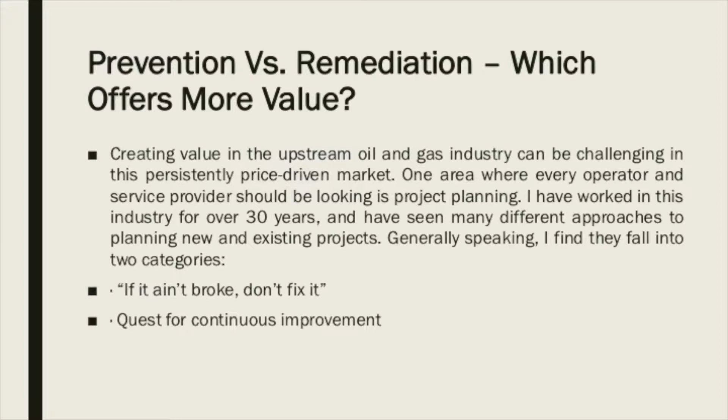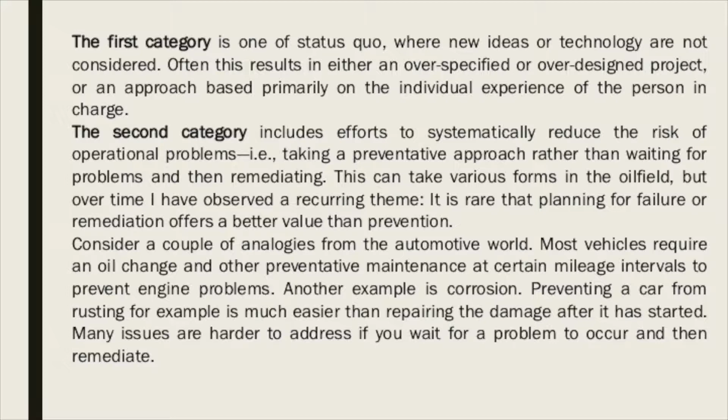One area where every operator and service provider should be looking is project planning when they're building the new equipment. I've worked in this industry for over 30 years and have seen different approaches to planning and existing projects. Generally speaking, I've found two categories: if it ain't broke, don't fix it, and a quest for continuous improvement. The first category is one of status quo, where new ideas and technology are not considered, often resulting in either an overspecified or over-designed approach to building new equipment, otherwise based on a person's knowledge of who's in charge of the project.

The second category includes efforts to systematically reduce the risk of operational problems, i.e. taking a preventative approach rather than waiting for problems and then remediating. This can take various forms in the oil field, which I'm sure we've all seen. But over time, I have observed a recurring theme: it is rare that planning for failure and remediation offers a better value than prevention.

Consider a couple of analogies from the automotive world. Most vehicles have a maintenance schedule where you change your oil at certain intervals and or mileage. Another example is corrosion. Preventing a car from rusting is much easier than repairing it after it starts to rust. And many issues are harder to address if you wait for a problem to occur and then remediate.

Another consideration is financial risks. In any project, it is necessary to understand commercial risks. Unlimited investment to prevent risk is likely not an appropriate business decision, and eliminating risk entirely is often not the end goal. A balanced approach that seeks to reduce risks to the lowest level that is reasonably practical can drive better decisions. If the risk is a commercial risk, an analytical approach can be used to estimate the probability that a risk will occur and the associated cost.

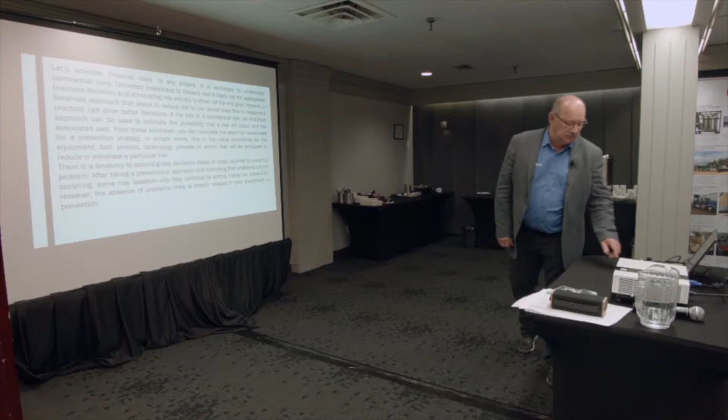One of the things I would encourage, and we encourage our engineers and operators, is to build a preventative approach into their project designs while they're designing the new equipment, and to involve the operators and the engineer in the design, while understanding the commercial risks. As stated earlier, planning for failure and remediation is rarely a better value than prevention.

By utilizing reliability engineering, which provides the structured foundation for identifying and prioritizing critical assets, since nearly all equipment requires some form of inspection and maintenance procedure to monitor their integrity and health conditions, to prolong life or to prevent catastrophic failures. We have the technology today to prolong life and prevent catastrophic failures by using automated diagnostic systems to monitor equipment.

Combining this approach with financial data, businesses can make risk-informed decisions to provide the most value through increased safety, reduced downtime and non-productive time, improved efficiency, and improved performance.

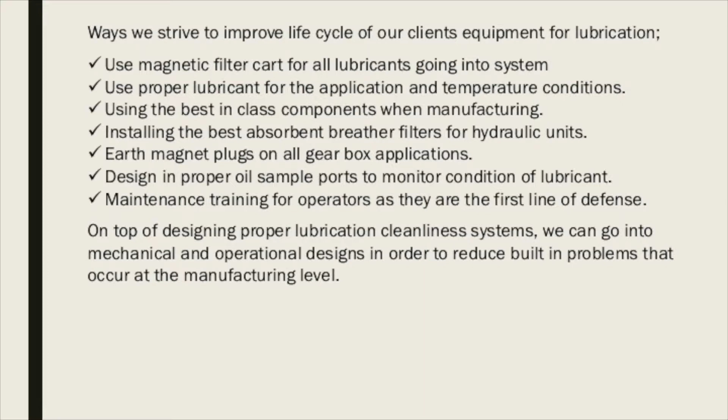Ways we strive at Wrangler and Coil Solutions to improve the life cycle for our clients' equipment, for example with lubrication: we use magnetic filtration carts for all lubricants going into fluid systems. We use proper lubrication for the application and temperature conditions, using best-in-class components when manufacturing, like magnetic filtration. We install the best absorbent breather filters on hydraulic units to keep the water out.

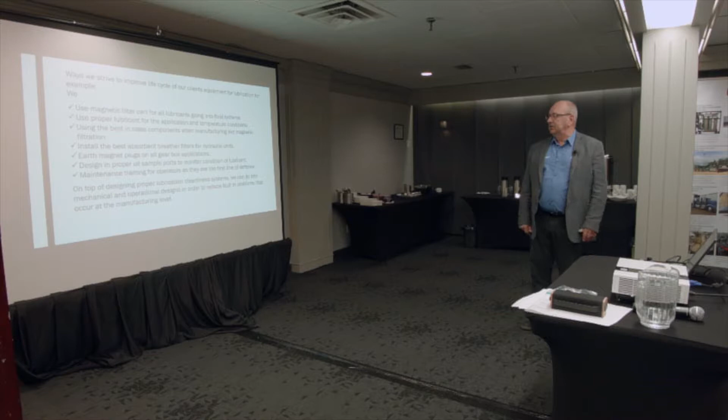We use rare earth magnetic plugs on gearboxes, transmissions, planetaries, and drive differentials. We design proper oil ports for monitoring lubrication conditioning, and we offer maintenance training for operators and others, as they are the first line of defense in running the equipment.

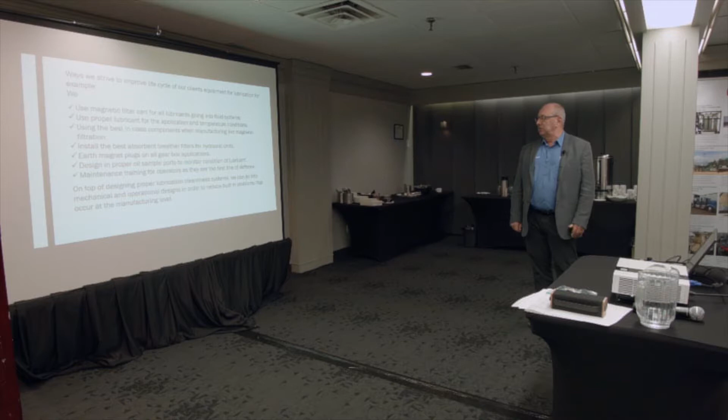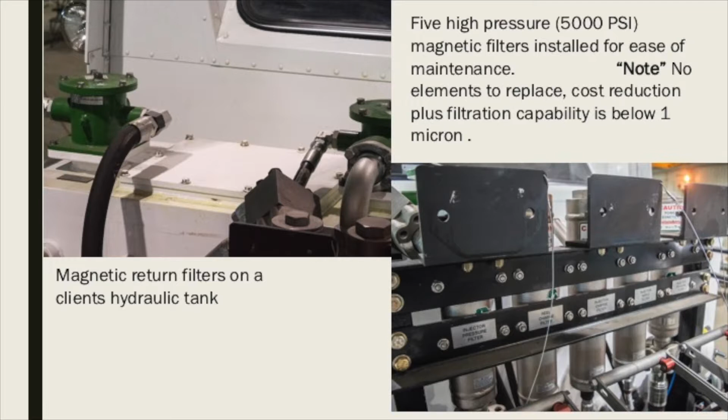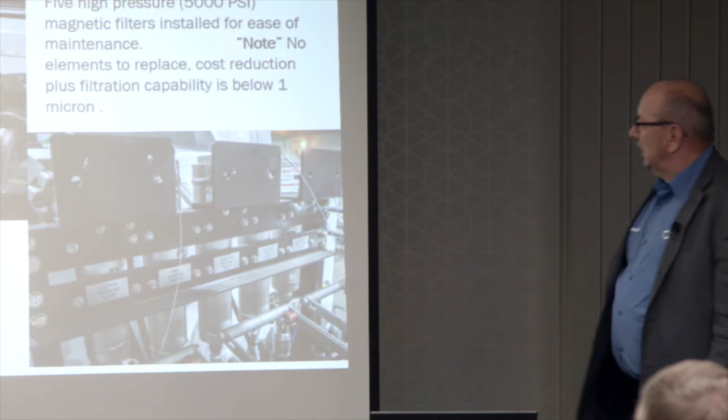This is an example of one of the units we just recently finished. Here we have a line of five high-pressure magnetic filtration units. As you can see, we've installed them for ease of cleaning. We have a platform here, easily accessible. The magnetic filter rod comes out the top so you don't have any spillage or environmental contamination. On the other side, we have the return filters for the hydraulic tank.

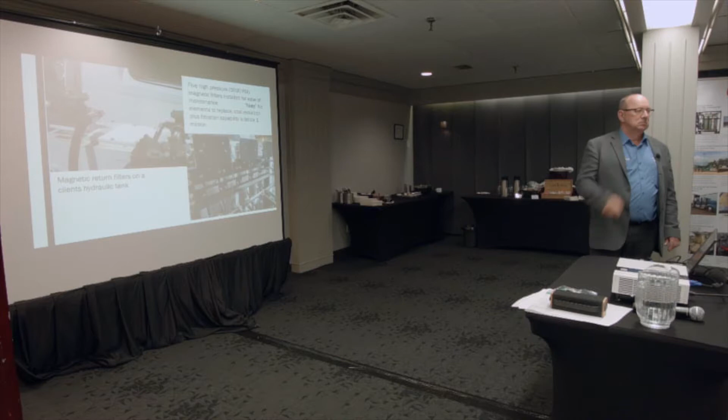So what we've done, I don't know if Roger's got the oil sample back for that, but they just did a test and the rods were fairly clean. They said there's not much on them now. So we had them wipe it with a white rag, fold it in, and take an oil sample and send it in so we can get tests on it.

A white rag works really good because as the system gets cleaner and cleaner, the particles get finer and finer until you can hardly see it, and you pull the rod out and they say there's nothing on there. But you wipe it with the white rag. I got below 1 micron, but it actually cleans to sub-micron, so I'll have to correct that, Roger.

Our belief with our company, and it's my belief—I come from a maintenance background, so I'm driving it home with all of our designs, from our engineers to our operations personnel—is that more involvement from operations, maintenance, and safety personnel in the design process for manufacturing equipment would result in more reliable, cost-efficient equipment.

It will cost a little more up front, but over the life of the equipment the ROI will be exponential, as it will result in increased uptime, reduced downtime, increased safety, and lower maintenance costs due to failures during operation. I believe this would also help attract the best operators in the industry, because everybody wants to run the best equipment.

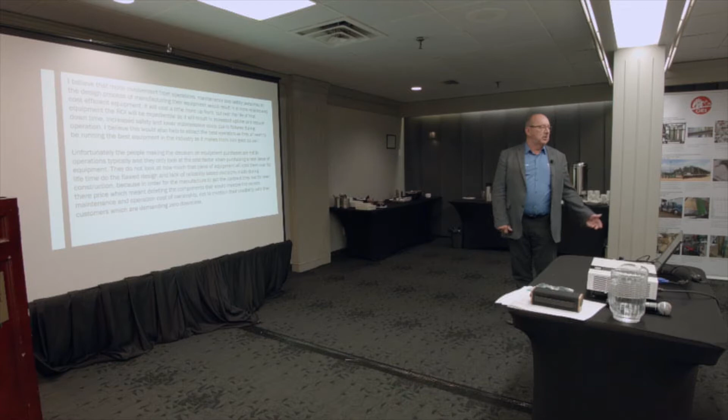One thing we've been trying to teach, or inform our customers, is that if they put in the best components, the best reliability packages, it will not only make us shine, but it will make them shine to their customers. In the oil and gas industry, now that oil price is below $50, everybody's looking at cost. They don't want downtime, and their customers are demanding zero downtime.

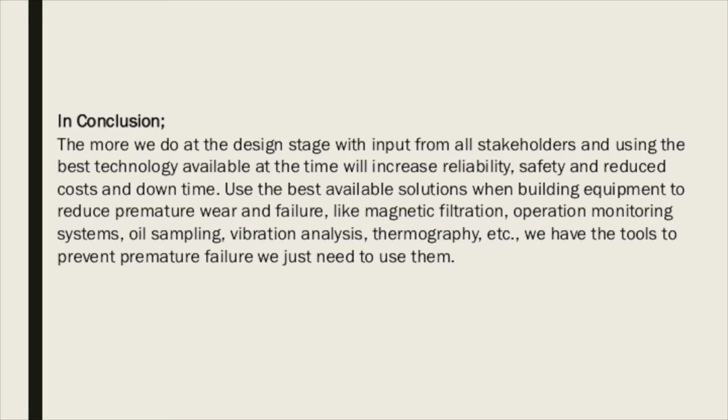In conclusion, as Woody said, one of the things he finds as the end user is there wasn't enough planning in the process, so he's got welded components and components where he can't put in magnetic filtration or better filtration, so you have to do it on the backside or customize, which costs more money.

So at the end, if we plan properly in the design process with the customer and ask all the operators running it about the problems they see, then we can build components and equipment properly with reliability in mind.

So the more we do at the design stage, with input from all stakeholders and using the best technology available at the time, will increase reliability and safety, and reduce costs and downtime. Use the best available solutions when building equipment to reduce premature wear and failure, like magnetic filtration, operation monitoring systems, oil sampling, vibration analysis, thermography, etc.

We have the tools today to prevent premature failure. We just need to use them. We need to consider the cost of ownership over the life of the equipment, not just the cost to acquire the equipment. And that's my presentation, short and sweet.

Question, yes sir. I mean, we speak here of microns and particles, but you're a manufacturer—do you present a quantified business case to your customers to show the return on equity or return on investment? Because that seems to be the...